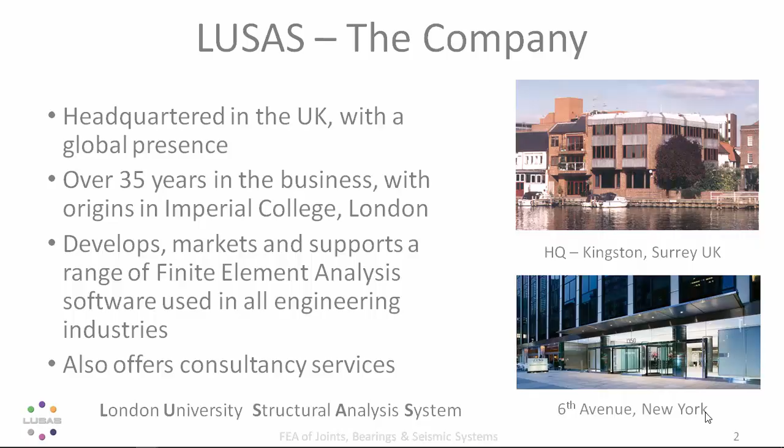LUSAS offers a range of engineering analysis software products covering applications such as bridge engineering, civil and structural engineering, composites, teaching and research for use in academia, general mechanical engineering, and specialist applications such as geotechnical analysis. They all provide accurate and reliable solutions for all types of linear and non-linear stress, dynamic and thermal or field analysis type problems.

So what is finite element analysis? At the most basic level, it's a technique for analysing structures. It's about notionally cutting up the continuum of a real structure into small elements connected at nodes which can be handled mathematically. The principle of subdividing a structure like that can be applied to structures of all forms and complexities, but it's not for analysing fluids or mechanisms.

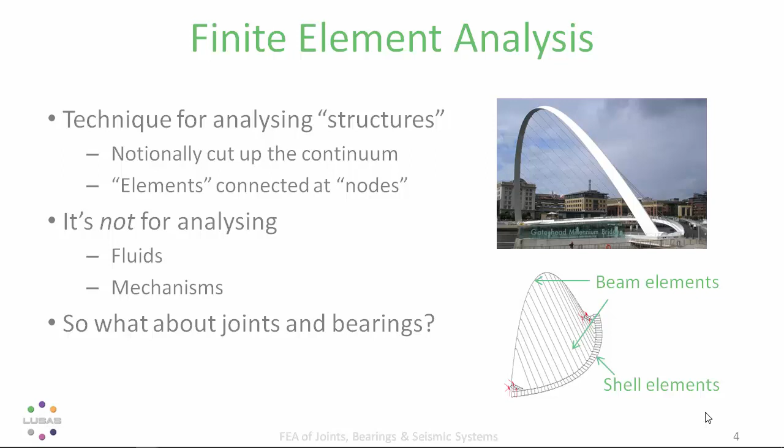So what about joints and bearings? Where do they fit in? They often behave like mechanisms. They slide and can't really be represented by elements which are fully connected to one another, and this causes problems.

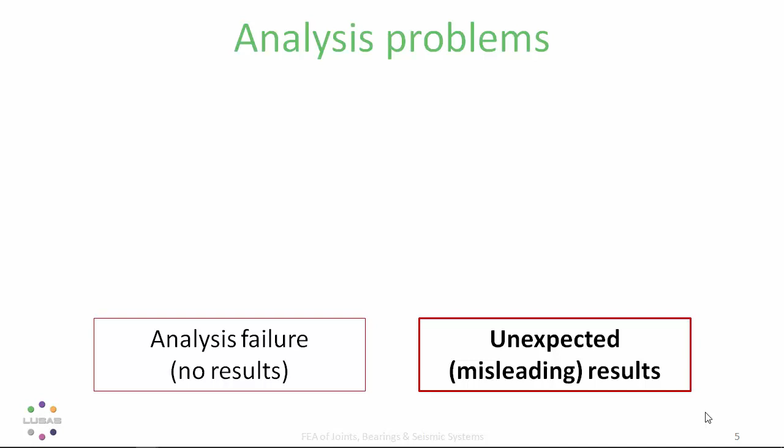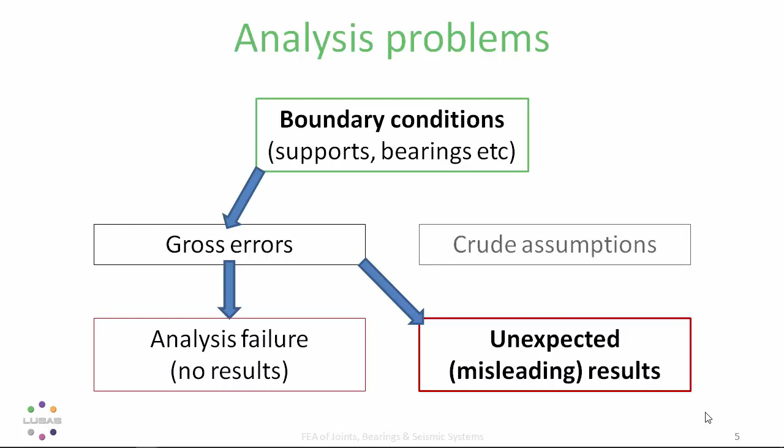Indeed, the LUSAS support desk helps thousands of engineers each year looking at failed analysis and unexpected results from models sent in. Gross errors in boundary conditions are amongst the most common causes of misleading results. Crude assumptions for boundary conditions are amongst the most common causes of misleading results as well.

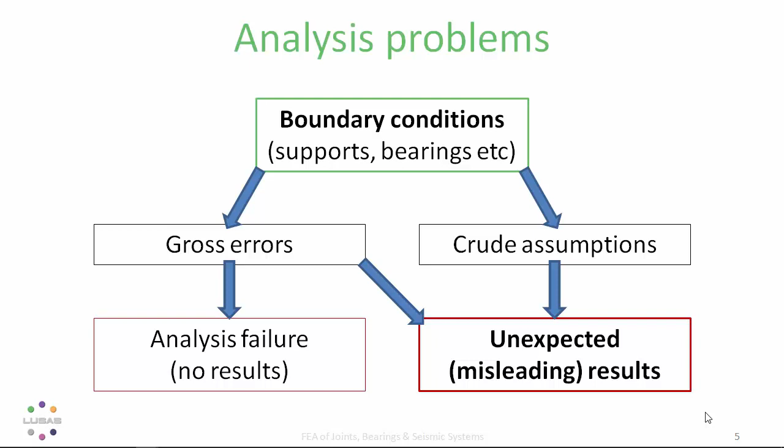So whilst engineers may spend weeks constructing elaborate finite element models, they often overlook boundary conditions to the extent that they actually forget to add any supports to their model at all, or they make crude assumptions such as treating supports as infinitely rigid. Nothing is infinitely rigid.

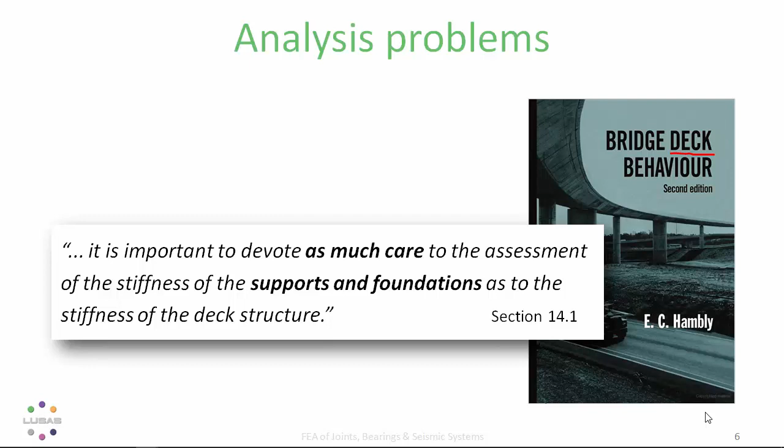Bridge deck behaviour, probably the most famous book on grillage analysis, was about the modelling of the bridge deck rather than the whole system. But Hambly, the author, could see the problem and he wrote: 'It is important to devote as much care to the assessment of the stiffness of the supports and foundations as to the stiffness of the deck structure.' And a simple example illustrates this.

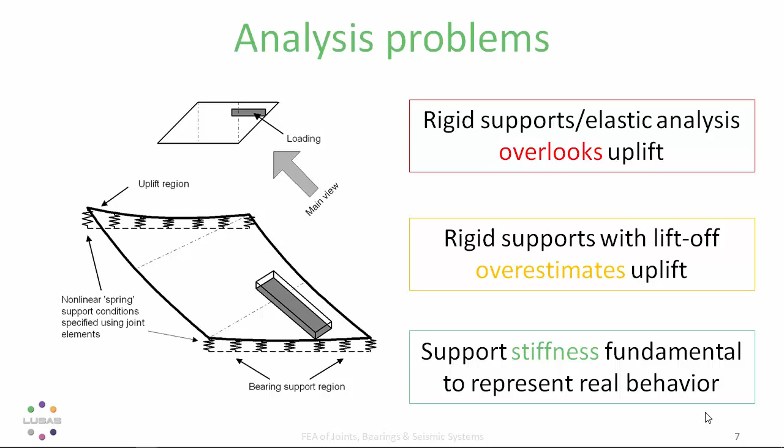This is a skew slab on elastomeric strip bearings. An assumption of rigid supports in a linear elastic analysis could overlook uplift and give misleading results. An assumption of rigid supports with lift-off behaviour is still rather crude and can overestimate uplift, giving different misleading results. Including the support stiffness in the analysis model is fundamental if we want results which reflect the real behaviour of the structure.

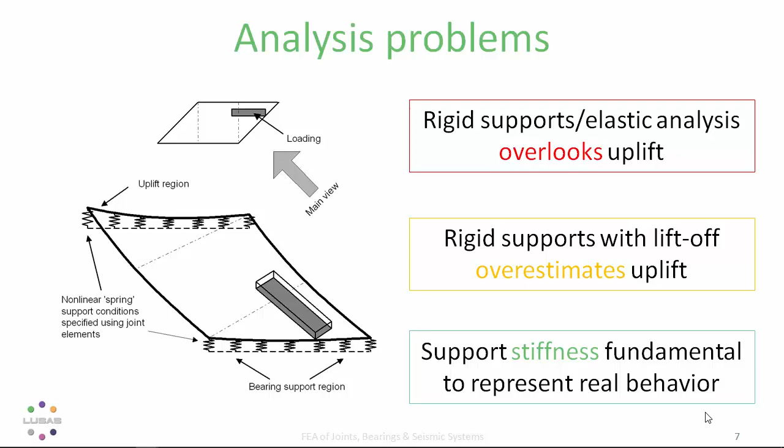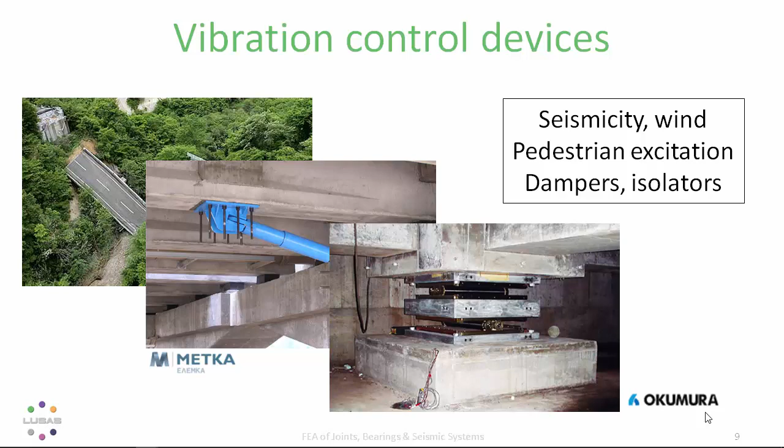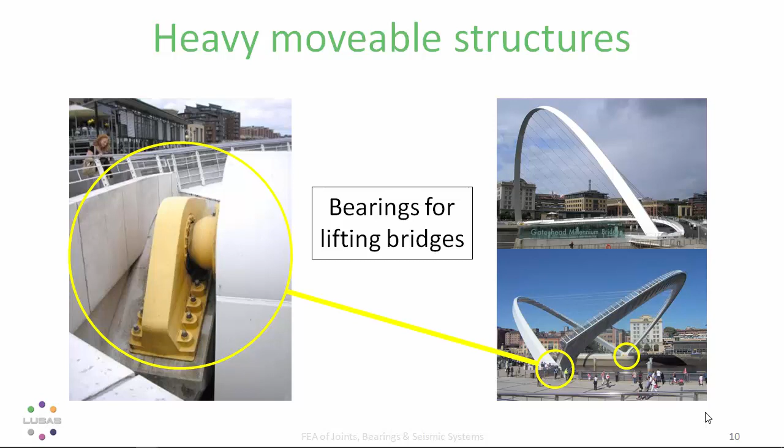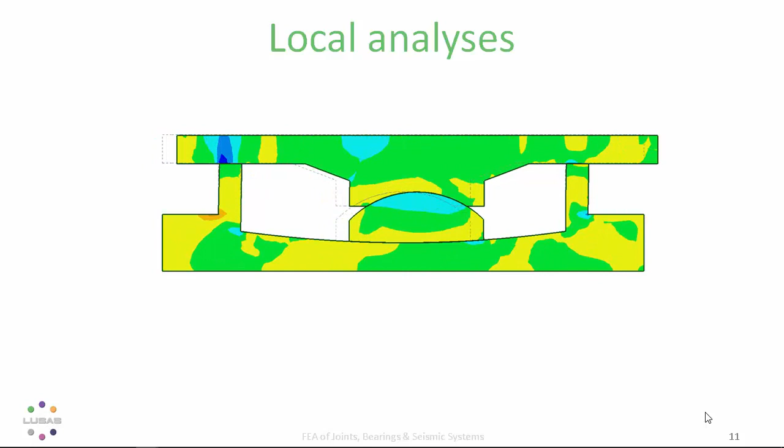But how we deal with all these joints, bearings or devices analytically falls generally into two categories. First, local analysis. The purpose of a local analysis is to discover the behaviour of the device subject to certain loading or excitation. For that, we would typically use continuum elements, either 2D or 3D.

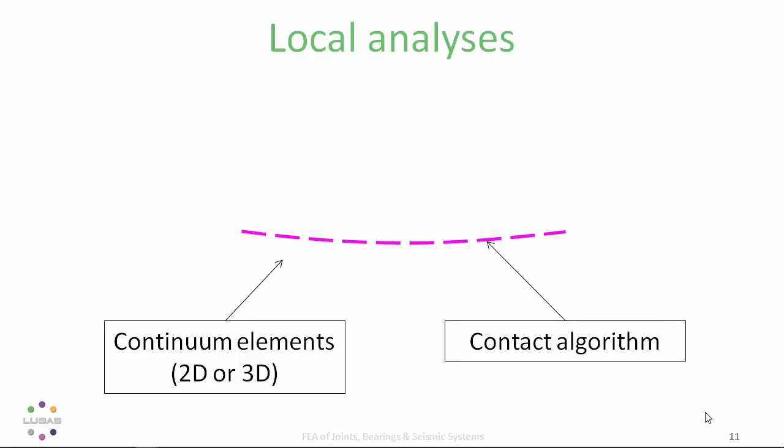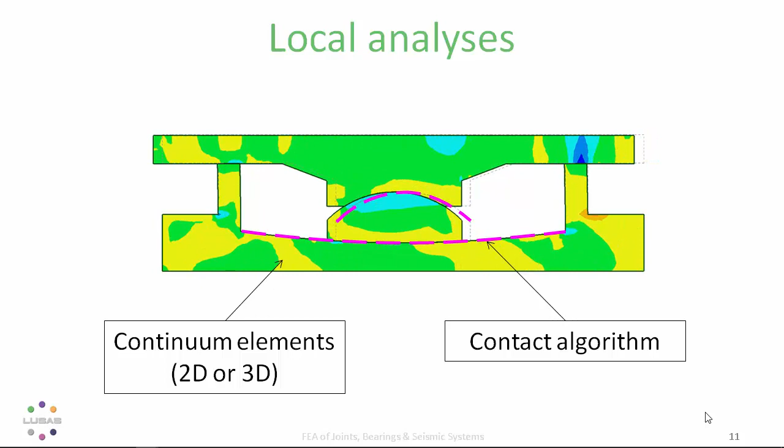This kind of model usually requires a contact algorithm enabling the software to track the interaction between the components making up the device. In this model, the relative displacements of the parts and the stresses in any part of the device can be determined based on the identified points of contact across two slip planes: the first being the lower concave dish and the slider above, and the second being within the articulated slider on top of the dome.

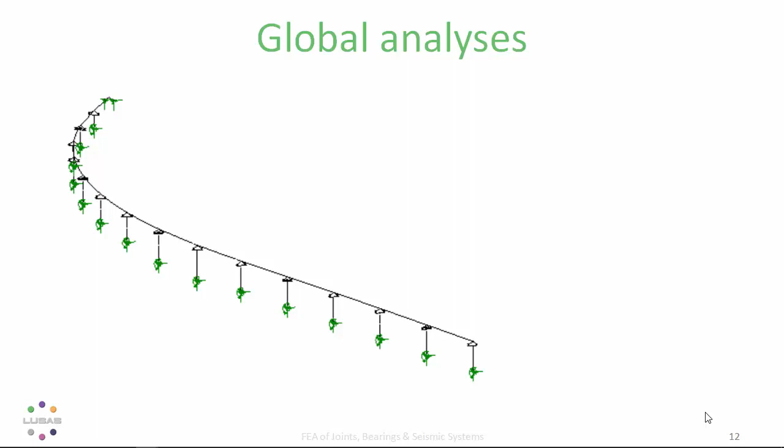Alternative to a local analysis is, of course, a global analysis. The purpose here is to replicate the behaviour of the bridge, building or structure. We will include devices such as bearings and dampers within the system as a whole, usually using joint elements.

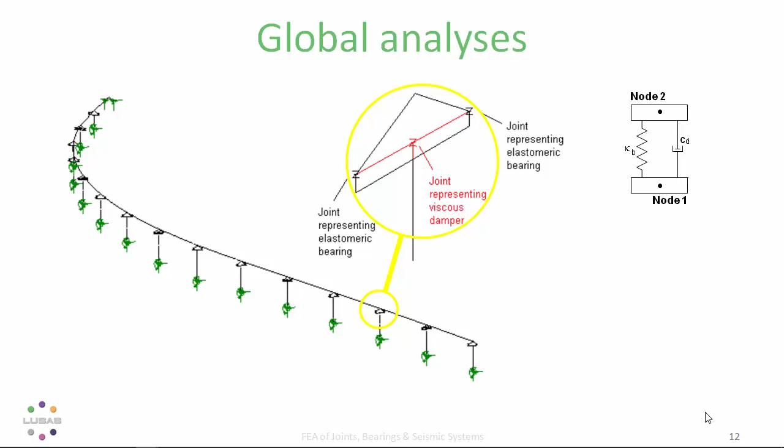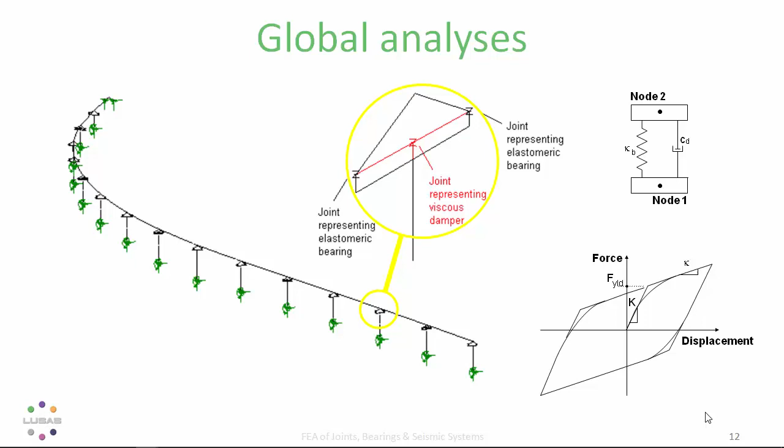Joint elements have two nodes connecting parts of the structure or connecting the structure to Earth, and joint elements have their own dedicated mathematical model conditioned to respond with deflections and accelerations based upon a real device. This might include damping and hysteresis.

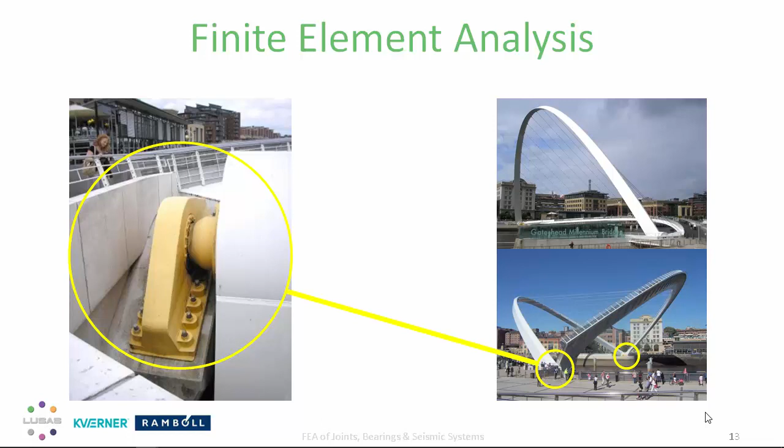The designers of the Gateshead Millennium Bridge in the UK, Ramboll, used both a local model to investigate the mechanical bearings and a global model for the bridge as a whole. Global models may require joint elements for movement, like this one, or simply for bridge articulation.

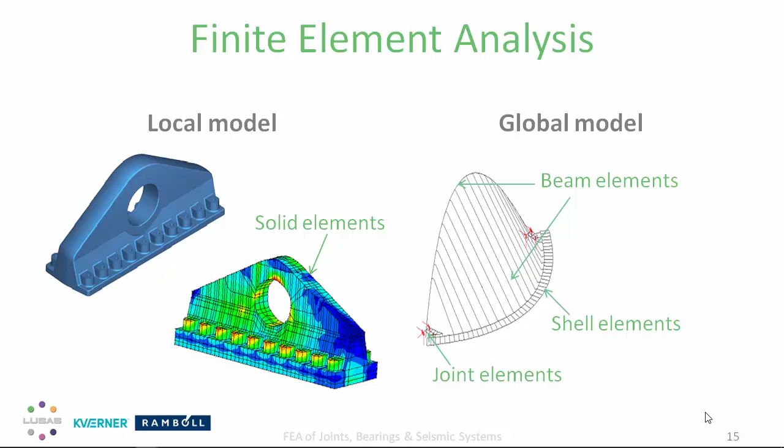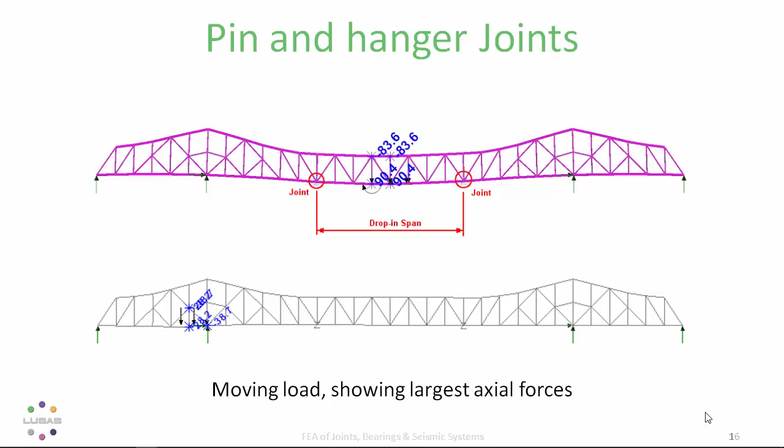This global steel truss bridge has two pin and hanger joints supporting the drop-in centre span. The correct articulation of the bridge, when subject to a moving load as seen here, can be modelled using a simple joint element. The rotations at the joint mustn't exceed a design value, and the model can be used to check for that. In extreme conditions, the joint could even reach its maximum rotation and become jammed, and a joint element can be given suitable properties to model that sort of change in behaviour as part of a nonlinear analysis.

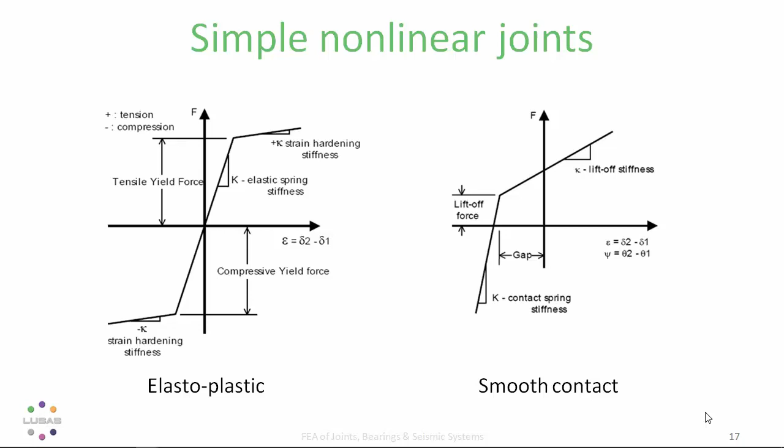Simple nonlinear joints available in software such as LUSAS include elastoplastic behaviour and smooth contact joints with, if required, initial gaps, and frictional joints, again with initial gap as needed. Joint materials like these may also include thermal properties along with mass and damping properties to suit dynamic analysis requirements. Smooth contact or frictional joints may be used for lift-off or hook type contact problems as well.

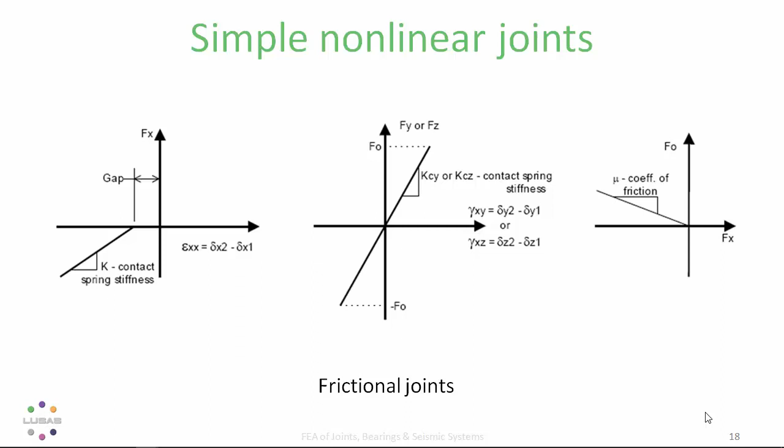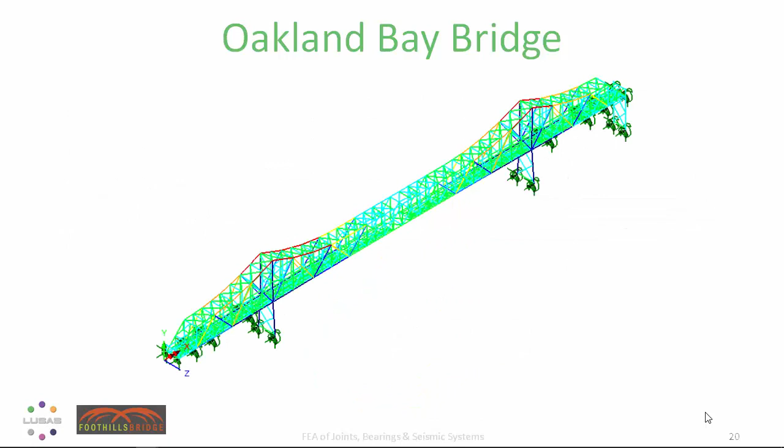Foothills Bridge made a global model of the San Francisco Oakland Bay Bridge with its hanger joints. A really comprehensive model for this large dismantling project. Here you see the animation of the dismantling.

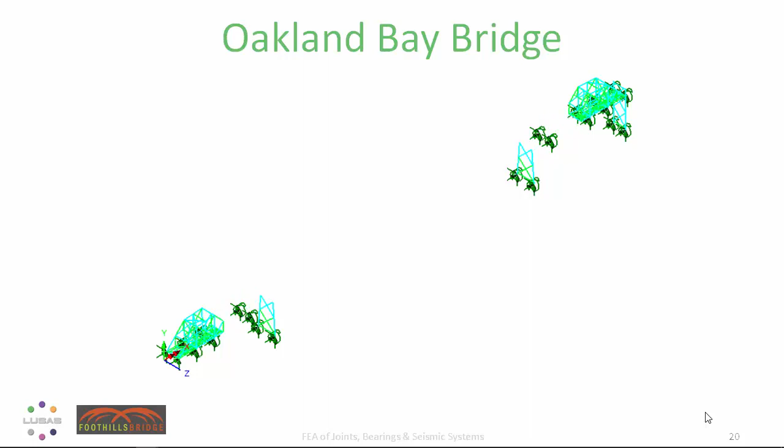A fantastic deconstruction sequence case study which you can read about on our website. Here you see a series of images of the dismantling sequence.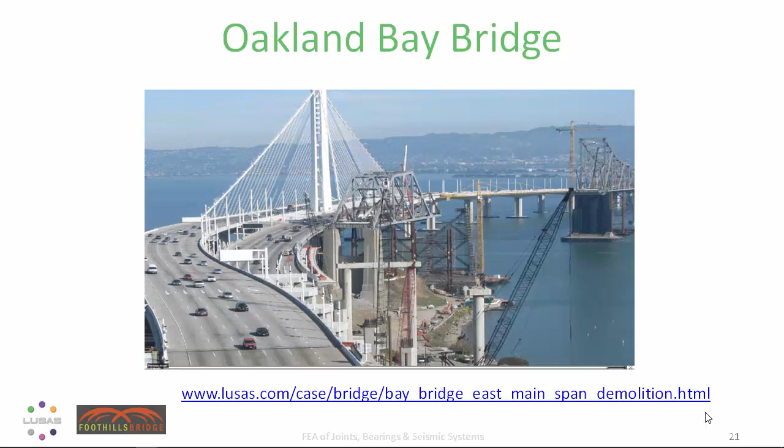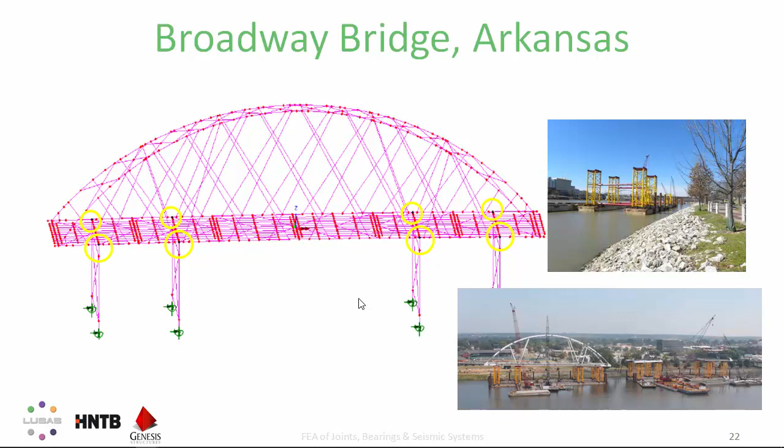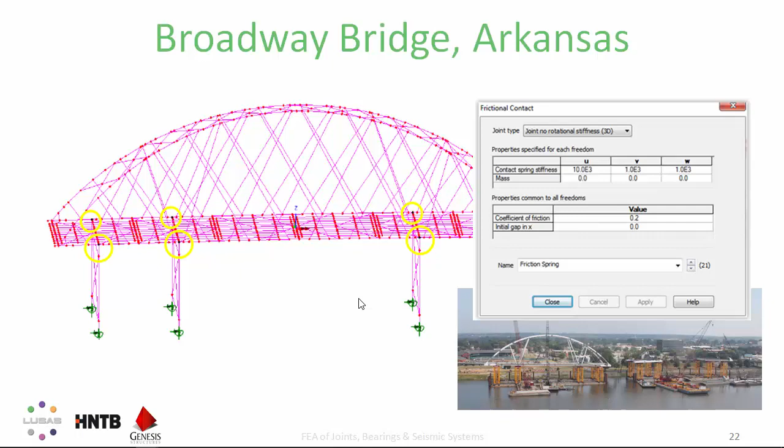Genesis Structures carried out the erection engineering using frictional contact joints between the deck and the towers, and this ultimately led to a less conservative, cheaper but safe design for the towers.

Genesis Structures were also employed by Massman Construction to model the surgical deconstruction of the Paseo self-anchored suspension bridge in Kansas City, Missouri, next to the new KC Icon cable stay bridge.

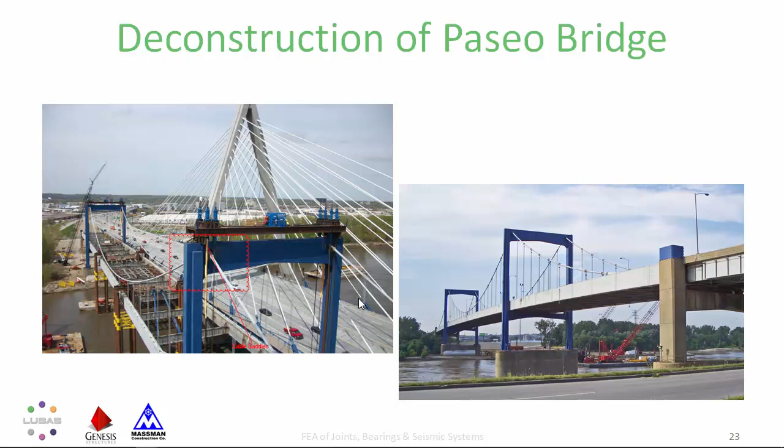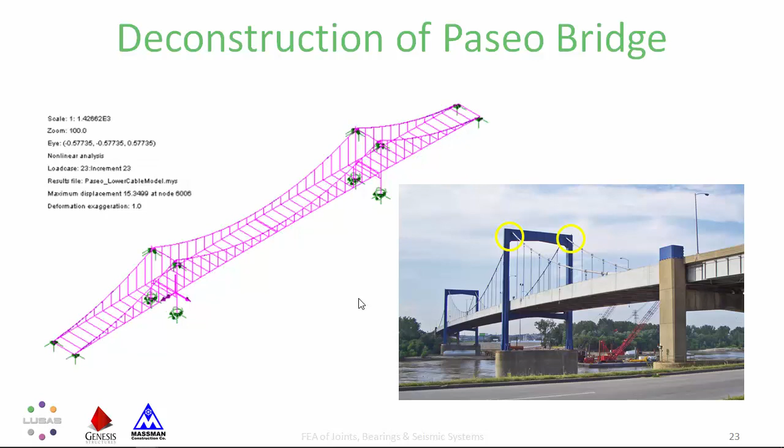Here you can see the cable lowering sequence with the cables being moved in two planes, and the saddles at the top of the towers, details of which you can see here, supported the main cables and translated 4.5 inches during construction back in 1954.

They were then locked down with steel plates. During the working life of the bridge, the deck was replaced and bearings raised, so a LUSAS model was built of the saddles using joint elements to help predict the locked-in stresses and the potential movement once the steel plate was cut in the deconstruction sequence.

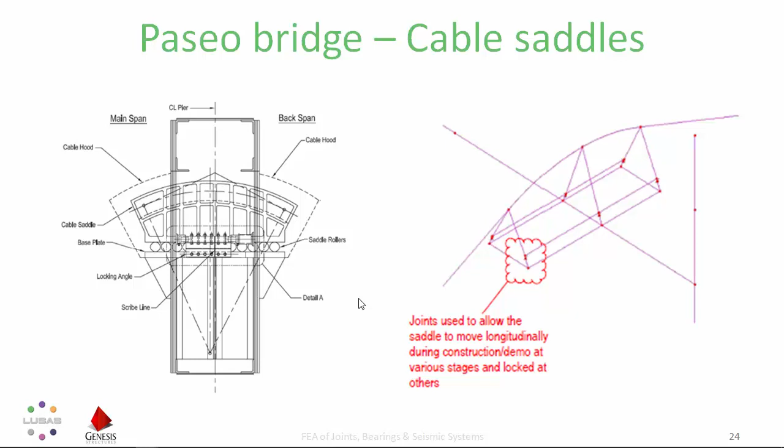Jacks were put into place, and the plate cut, and the jacks slowly released. The actual movement was as predicted in all the saddles within a quarter of an inch, and the bridge was safely dismantled.

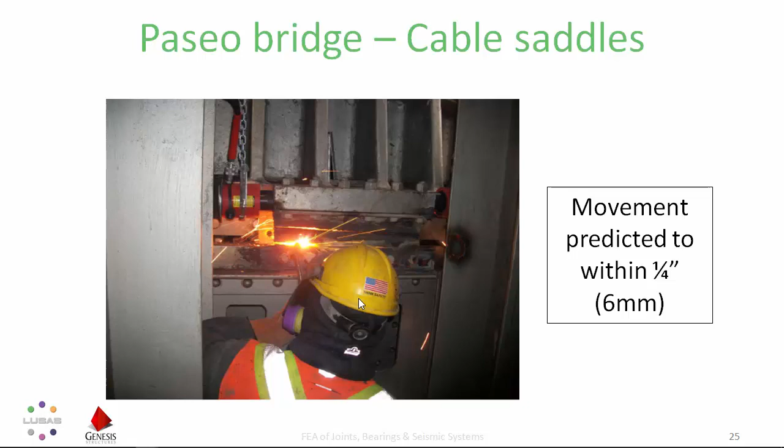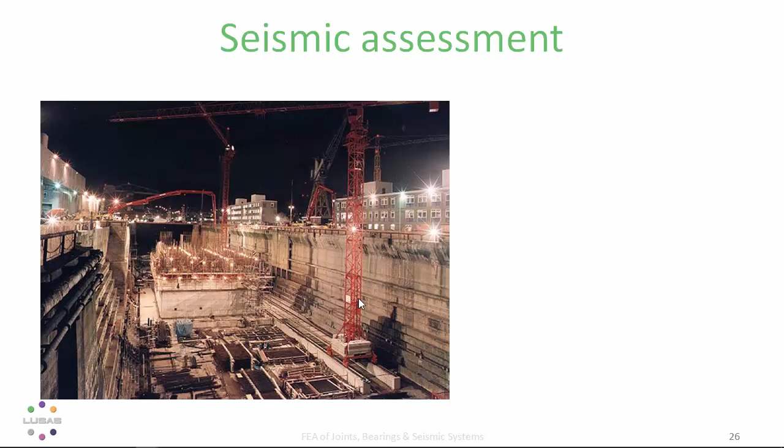This dry dock in the UK was to be used for the refit of nuclear submarines. It is closed by floating this massive reinforced concrete caisson into place, sinking the caisson, sealing the joint along the bottom and sides, and then draining the dock.

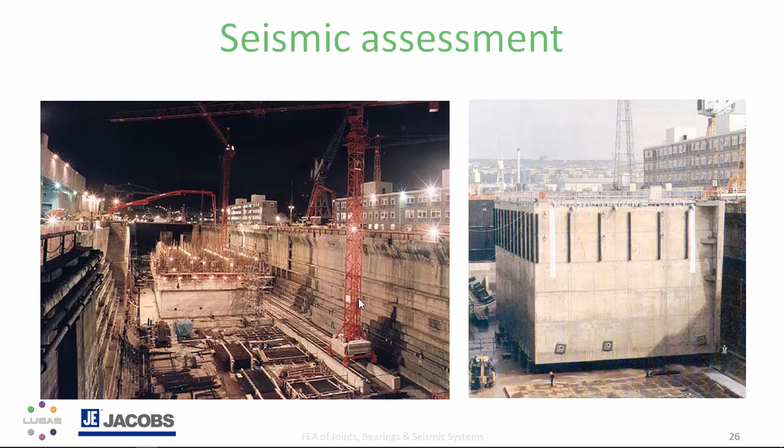Obviously, once the work on the submarines is underway, nothing must cause a breach in the caisson, not even a rare English earthquake. And so a part of the safety case for this work was to analyse the caisson with frictional non-linear contact joint elements, modelling the shear key connection and also modelling the potential uplift from subgrade.

A time history analysis was carried out with steps of 0.005 seconds, and here we can see the liftoff and recontact vectors and the axial force in the caisson when the strong motion occurs between 3 and 4 seconds. You can see the clock ticking over at the bottom there.

The hydrodynamic force from water enclosed in the cells was simulated using more joint elements to provide hydrodynamic mass against the walls and for damping actions on the base interface. The walls and the base themselves were modelled using shell elements, and the analysis clearly showed the caisson had adequate structural capacity to withstand a seismic event and that the seals could accommodate the displacements expected.

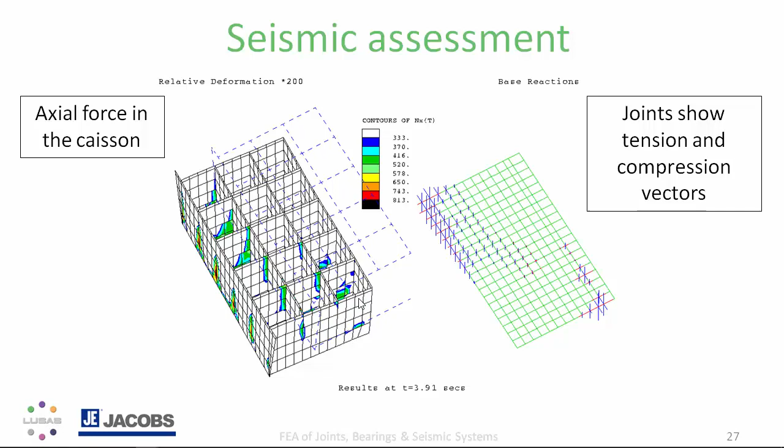This seismic assessment was mostly about movement or liftoff. For many seismic analyses, it's necessary to go way further in terms of modelling specific seismic isolators.

These more complex bearings exist to control the damage impact of seismic activity on structures. The bearings are used principally for seismic isolation, energy dissipation, or to model an active control system. They all exhibit hysteretic behaviour, which is that highly nonlinear phenomenon that occurs in systems that possess memory.

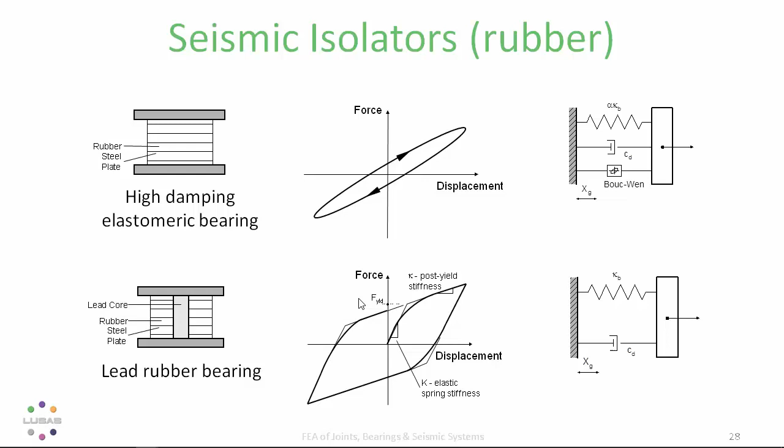3 principal types of isolator are available, including high damping rubber bearings, the most commonly used elastomeric bearings, lead rubber bearings with plastic yield and biaxial hysteretic behaviour, and sliding frictional pendulum systems which have pressure and velocity dependent friction coefficients and biaxial hysteretic behaviour.

The single friction pendulum bearing, or the multiple multispherical derivatives, such as the triple friction pendulum bearings, are the most widely used passive seismic isolation bearings in the United States.

These allow an adaptive force deformation behaviour, hence adaptive seismic isolation, whereby stiffness and damping properties of the bearing can change at predetermined displacement amplitudes.

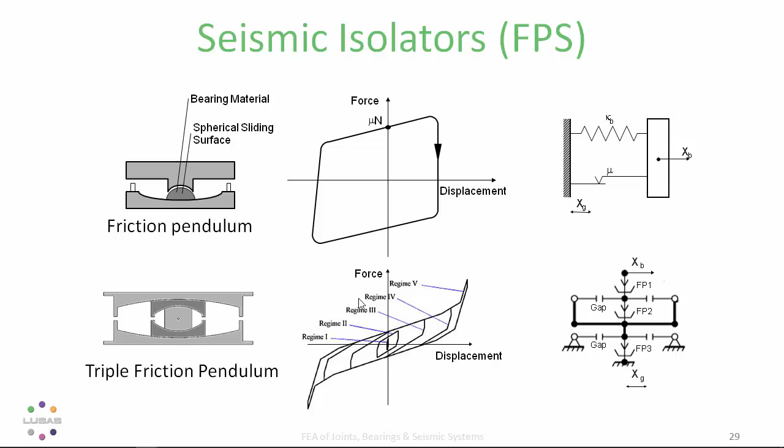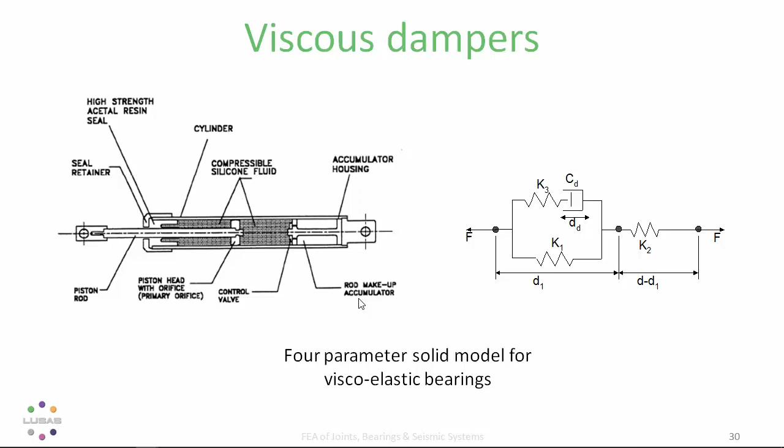Likewise, LUSAS allows for the inclusion of viscoelastic dampers, such as the 4-parameter solid model shown here, which comprises up to 3 springs and a dashpot.

So these non-linear isolators and dampers can be included in a global analysis, as they have been in this 1,108 metre, or over 3,600 foot long, multi-span pre-stressed concrete road bridge structure in the Mediterranean region.

This enables design forces arising from an earthquake, such as the recent 2016 quake in Italy, to be assessed to Eurocode EC8. This bridge has an expansion joint midway along its length.

It was modelled with engineering thick beam elements, or Timoshenko beams, defined at the respective centroid of each structural component. Connection between deck and elastomeric bearings, and between the top of the piers and the elastomeric bearings, was made using nominally stiff members of negligible mass.

These represented rigid links between the centroids of components and were defined with negligible mass so as not to contribute to the dynamic behaviour of the bridge.

2 longitudinal dampers were located at the first abutment and transverse dampers located at every 3rd pier along the bridge, which required an additional stiff member arrangement.

Eigenvalue analysis on both bridge structures found that 225 structural modes were required to meet the 95% mass participation factor value prior to carrying out subsequent spectral response analysis using EC8 design spectra.

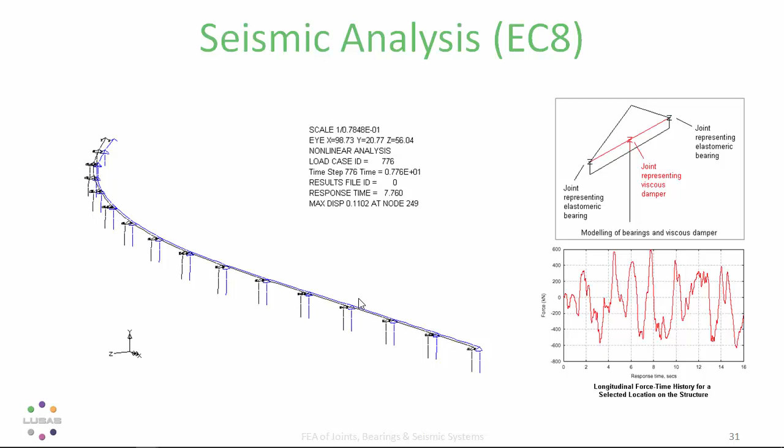Good correlation of results was achieved for both the spectral response and the transient dynamic analysis, verifying the modelling techniques used by the original designers and the viscous damping capabilities of LUSAS.

A similar global model was used to define a retrofit strategy for the Milford-Montague Truss connecting New Jersey to Pennsylvania across the Delaware River to accommodate the demands of seismic and temperature effects.

This included elastoplastic lock-up devices at the Montague abutment and guided isolation bearings at the piers. The existing fixed bearings were retained at the other abutment. The isolation bearings transfer longitudinal loads from the piers to the truss, and the lock-up devices evenly distribute this load between the abutments.

This bridge project was subject to a paper presented at the 5th National Seismic Conference by Tom Murphy and Mike Irwin and is available on the web.

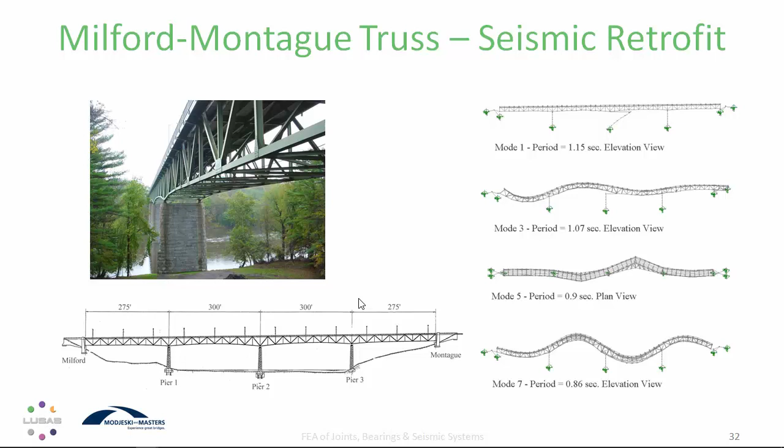So in general, global analyses often include joint elements to model the behaviour of specific bearings or damping devices, and joint elements have been developed to represent all kinds of device or structural arrangement for pushover analysis, large displacement analysis, and transient analysis. These are invariably hysteretic and can represent, for example, the behaviour of structural connections such as reinforced concrete, steel, and timber.

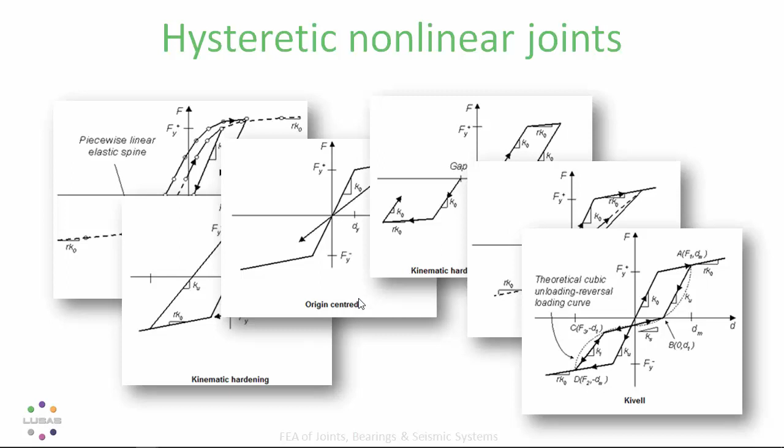There are a wide range of these joint types available in LUSAS, as seen on these slides, such as the last one here, the Fukada degrading trilinear hysteresis for modelling plastic hinges in reinforced concrete beams, which changes stiffness at cracking and yielding points.

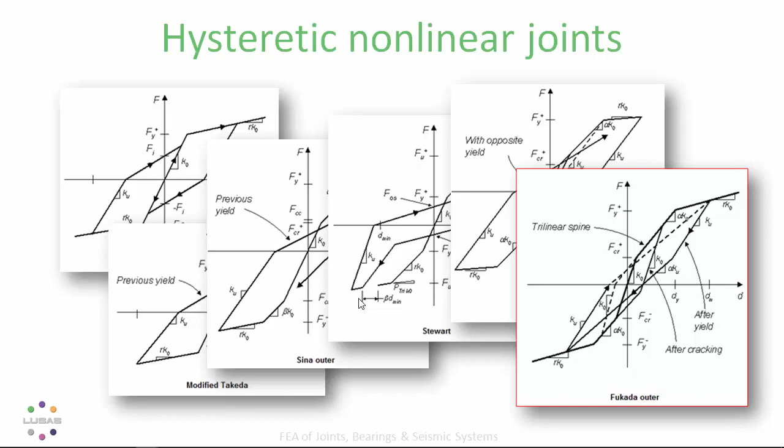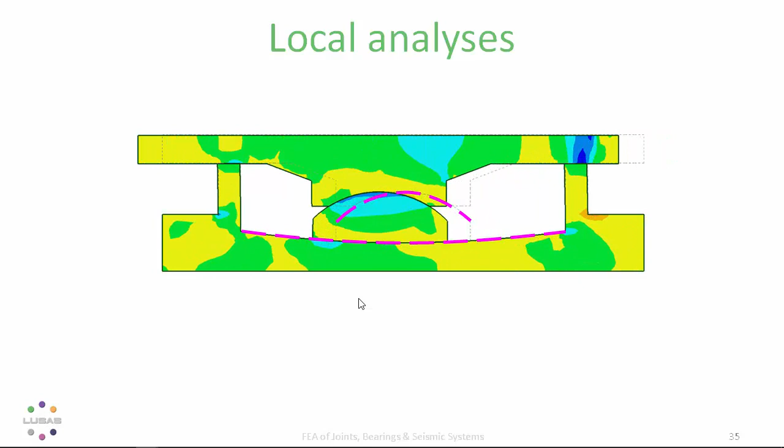Obviously, those many joint material models have been developed with specific purposes in mind, and there are more details in the LUSAS manuals. But if we think back to local analysis, although joint elements are able to model contact and liftoff, where there are elements moving right over one another with relatively large displacements, a contact algorithm, known as a slide line, or in 3D a slide surface, is a more powerful computational tool.

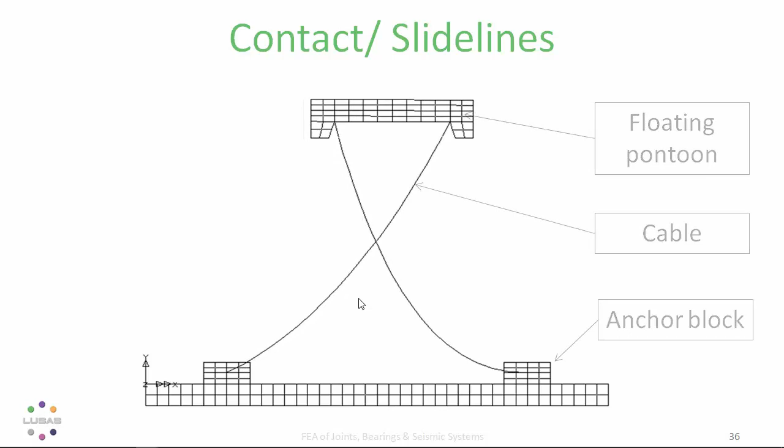This example uses a frictional slide line which shows very clearly how contact is transferred from element to element. It's actually a floating pontoon restrained by cables to 2 anchor blocks sitting on a riverbed.

We can see that the cable becomes taut and the left block starts to be dragged along the riverbed with elements coming into and out of contact.

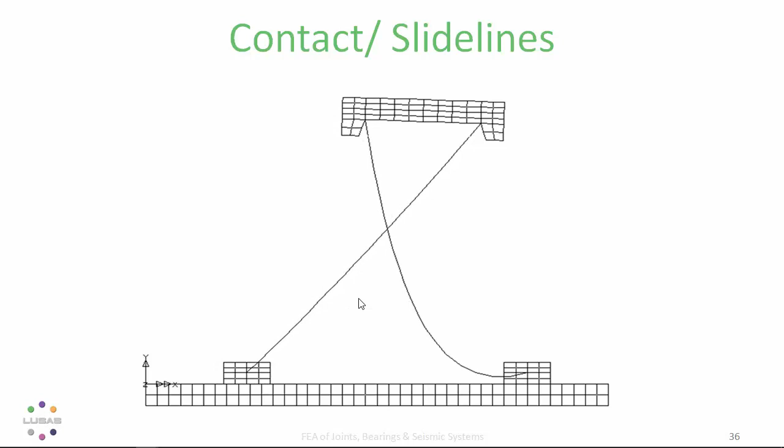This isn't something you could reasonably model with joint elements, so it requires a contact algorithm to detect which elements are transferring stress to which other elements in potentially very highly nonlinear situations, including dynamic analysis.

Indeed, you can see that in this local model. Frictional joint elements were used around the pin, while many other contact surfaces were included in the model by use of contact slide lines. This is a pin joint in the Turning Torso building in Sweden.

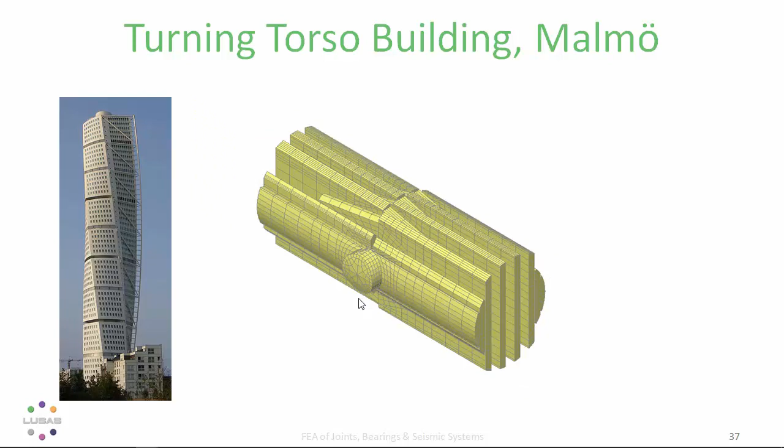Initial FEA models assessed the performance of both shell and solid element idealizations, with final all-solid models including geometric, material, temperature, and contact nonlinear effects.

With the experimental data, load strain measurements, very close agreement between measured and calculated values of ultimate load could be seen. The analysis also clearly showed that the failure mode was plastic collapse, with elastic buckling occurring at a much higher load.

Results were used by Hyder to help determine which bearings would require strengthening for increased bridge capacity. Then, whilst traffic was traversing the structure, they had to ensure that the strengthening modifications, which consisted of welding an additional plate onto the sides of the bearings to stiffen them, were safe and effective.

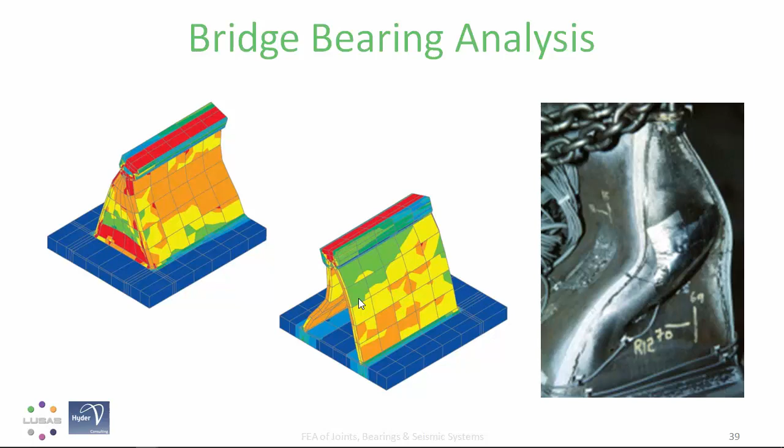Similarly, nonlinear continuum models were used to assess the half joints, sometimes called dapped ends, for the existing Kingston Bridge in Glasgow, UK. Half joints were introduced into concrete decks as a means of simplifying design and construction operations, but they are a corrosion trap, particularly susceptible to chloride attack, and not easily accessible for inspection or maintenance.

In addition, on older structures, the half joints, as designed, may not even be code-compliant with today's standards and may require assessment for increased modern vehicle loadings.

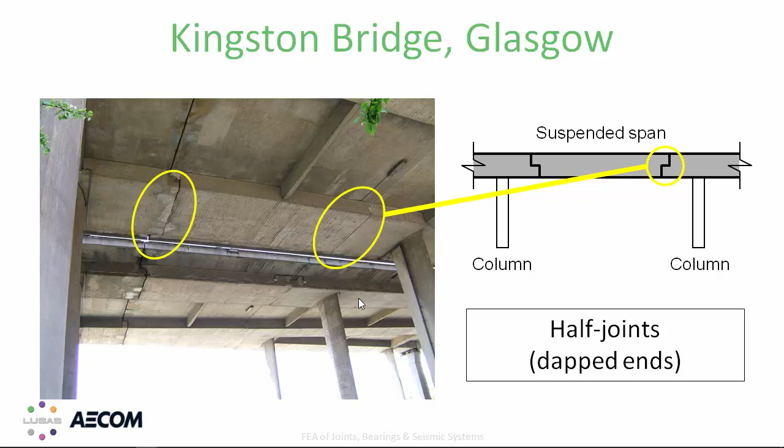This bridge carries an average of around 180,000 vehicles a day, one of the busiest in Europe, and it includes many half joints designed to standards in the 1960s.

An assessment showed that some of the half joints were not compliant with modern codes, and so FEA models were built and then validated with a destructive load test on a typical joint in a ramp that was being demolished anyway and replaced as part of other work taking place on the structure.

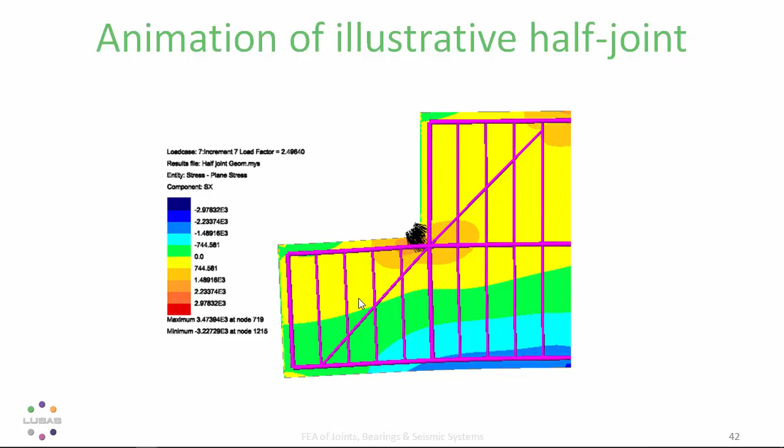The test and the corresponding FEA model agreed and showed significant spare capacity for the joint. This gave the designers AECOM confidence to reassess all the remaining half joints in the bridge, eliminating what could have been incredibly costly and disruptive replacement works.

This sort of analysis can involve not only continuum analysis and slide lines, but also other nonlinear functions. In this case, the LUSAS concrete cracking and crushing material model, as shown in the illustrative half-joint analysis here.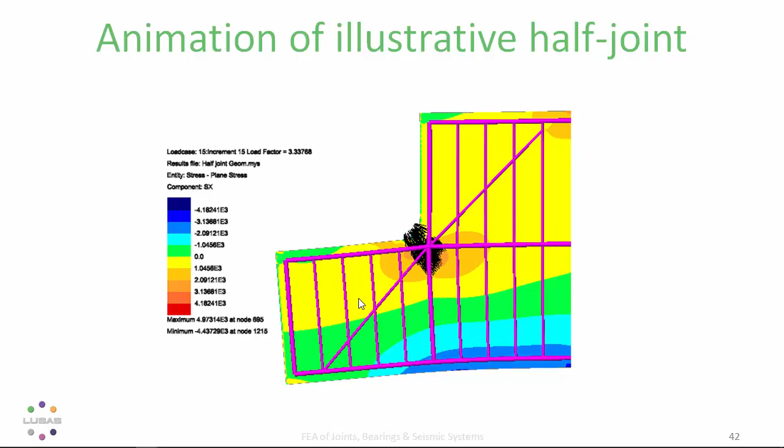It's probably one of the most advanced nonlinear concrete material models in the world today. It's been validated against all kinds of experimental data, and this model even includes cracking, crushing, aggregate interlock, and remembers unloading and reloading. It also gives predicted crack widths under load.

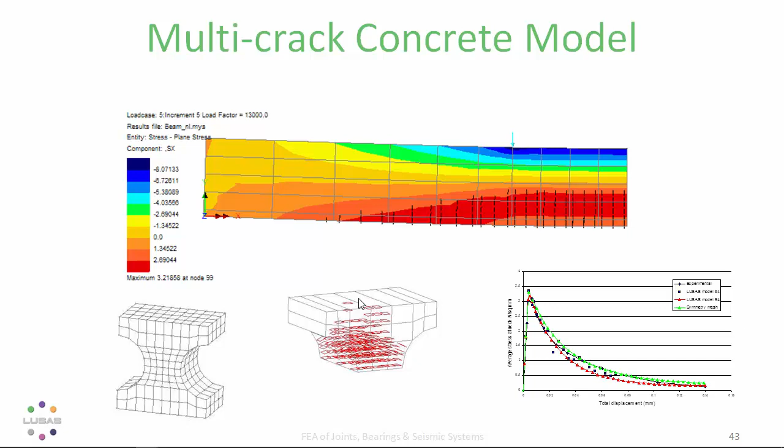More recently, AASHTO commissioned research into span lock behaviour by Hardesty and Hanover. One of the test structures was the Hillsborough Avenue Bascule Bridge in Tampa, Florida.

The analysis examines stresses in the lock bar system, including the lock bar, the guides and receivers, and the shoes in the guides and receivers that contact the lock bar.

The local model of the lock bar is using 3D continuum and contact slide surfaces. It's embedded within a larger global model which comprises thick shell elements and Timoshenko beams.

This avoids the transfer of data between global and local models, retaining the accuracy in the area of interest and the efficiency of a global model for the remainder of the structure.

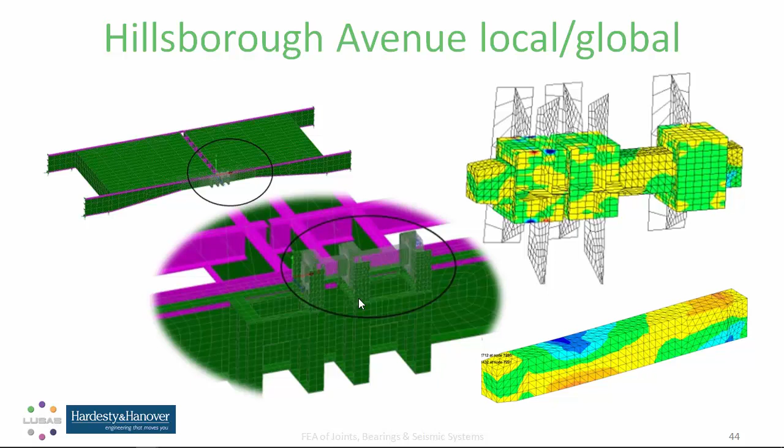The bridge was also instrumented to confirm the behaviour of the finite element model, and so now the model can be adjusted to analyse a multitude of different lock bar designs.

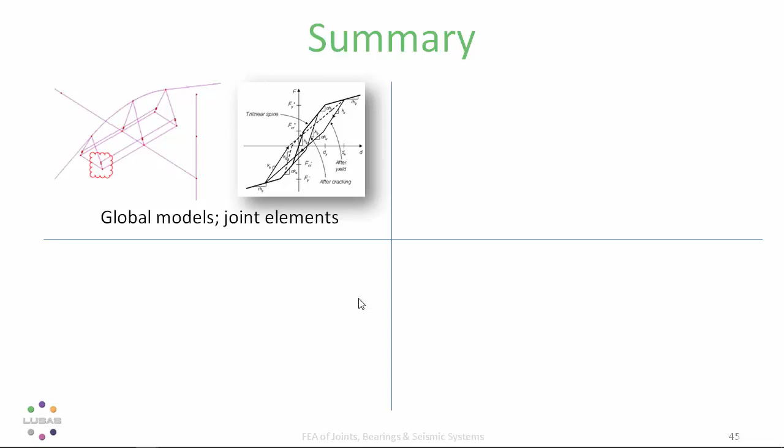And so we've seen how joint elements can be used in global models to represent all manner of interfaces and devices, from simple pin joints to advanced seismic isolators. Local models with contact slide lines can enable study of devices, and the two can be combined within a single model for efficiency, also incorporating other forms of nonlinearity such as concrete cracking, soils, or large displacements as required.

I hope this has given you an introduction to how finite element analysis can help you.